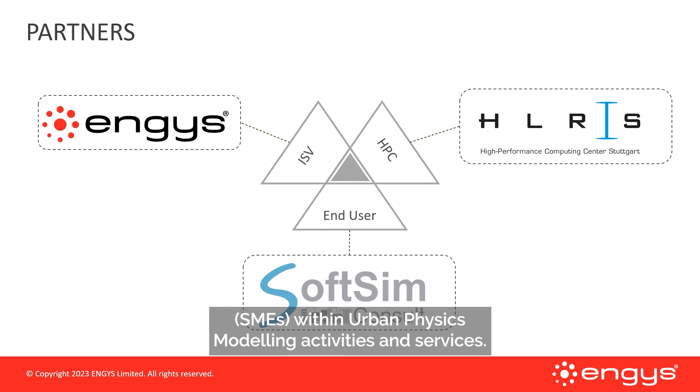As most of you know, ENGYS is a global CFD product and service provider. They were founded in the UK back in 2009. The products are widely used in various industries, including automotive and AEC sectors. HELYX is the main product of ENGYS. The tool provides an easy-to-use GUI and unlimited scalability, and it is well validated with reliable methods and fully transparent. Furthermore, HELYX comes in a package with extensive written documentation and responsive technical support.

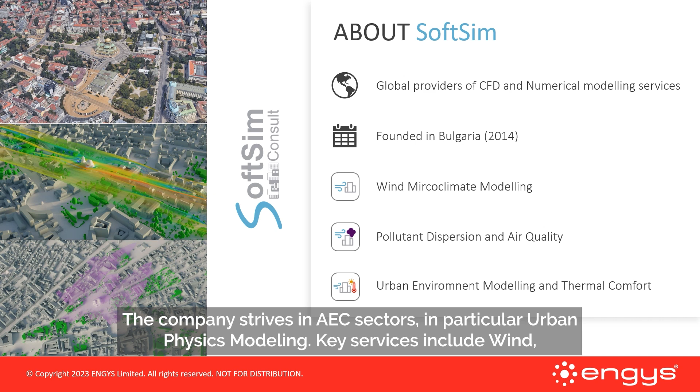SoftSim is a global provider of CFD analysis and consultancy services. We were founded in Bulgaria back in 2014. The company strives in AEC sectors, in particular urban physics modeling. Key services include wind microclimate modeling, pollutant dispersion and air quality, urban environment modeling, and thermal comfort.

The main objectives of the current webinar are an overview of the Cloud Sophia project by going through a discussion for AEC and UPM industry challenges, Fortissimo project motivation and details, as well as the main conclusions drawn during project and development works.

To understand the motivation behind the work, we need to say a little about the AEC sector and UPM industry. Architectural engineering and construction design are going through a rapid transformation to undergo the transition to a digital era. This pressures design teams to use more advanced modeling tools in the BIM process. This is particularly true for urban physics modeling.

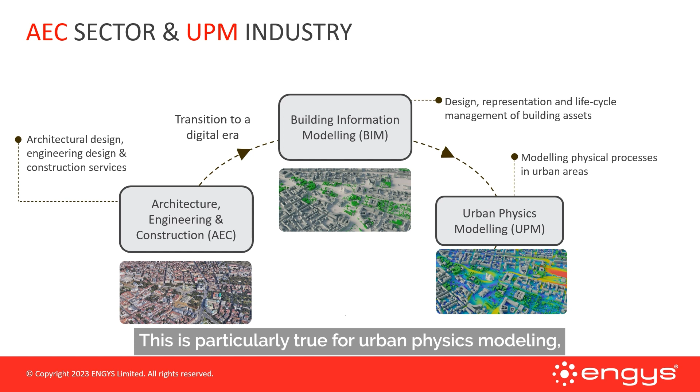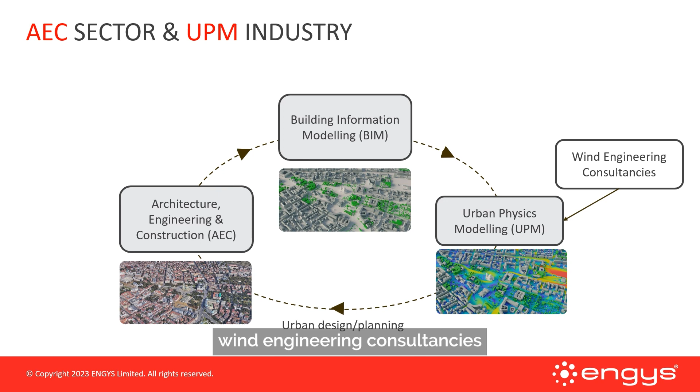SoftSim consultancy is thriving in the urban physics modeling sector together with many other small and medium wind engineering consultancies. Competing with large companies with complete engineering cycle services embedded in their structures becomes more demanding for high quality and fidelity CFD modeling and services.

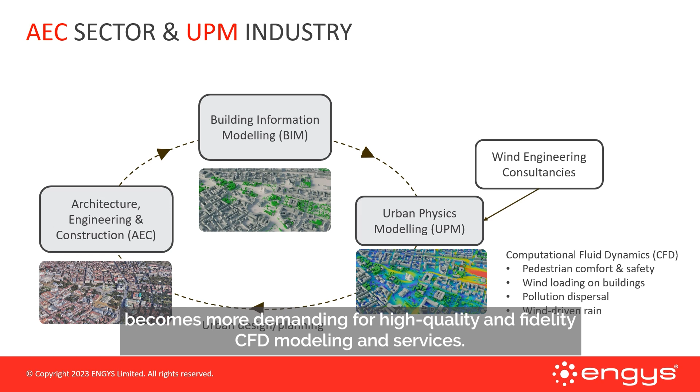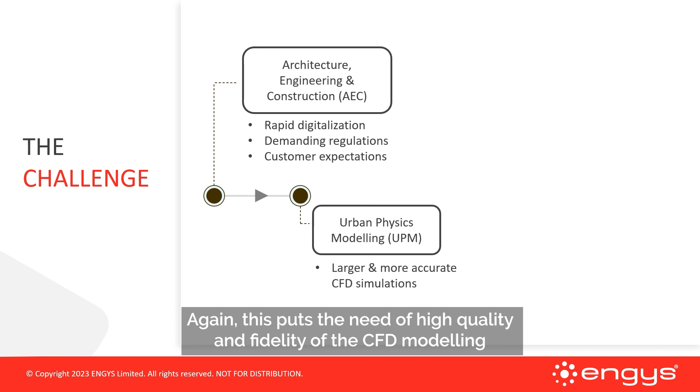Some of the main challenges in the industry are rapid digitalization of the sector, demanding regulations, and constant growth of customer expectations. Again, this puts the need of high quality and fidelity of the CFD modeling and services in the urban physics sector.

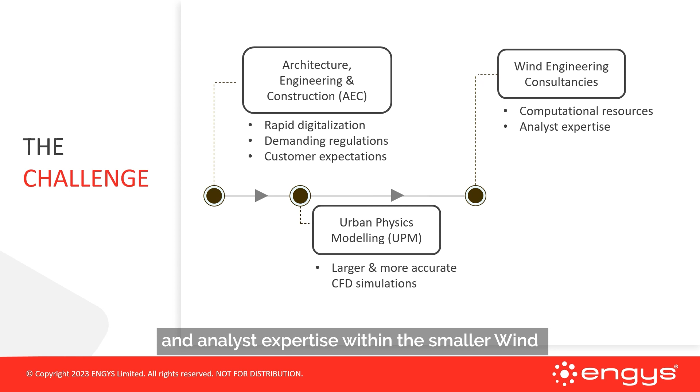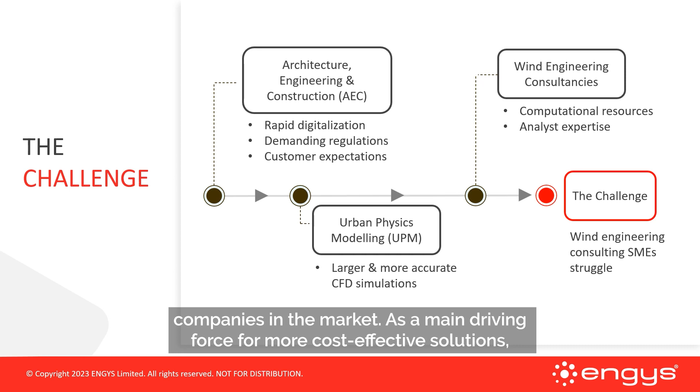All this emphasizes the need for larger computational resources and analyst expertise within the smaller wind engineering consultancies. Small and medium consultancies start to struggle to compete with larger companies in the market as a main driving force for more cost-effective solutions. Without SMEs, the entire architecture, engineering and construction industry would be put under high pressure.

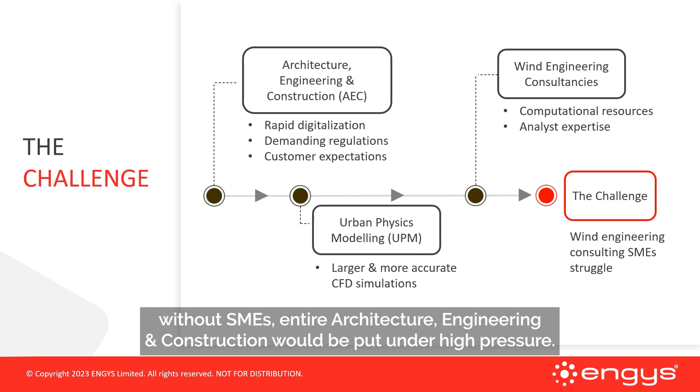This way, the main objectives of the current work can be clearly stated: meet the industry's demands for high-fidelity products, help SMEs keep up with the competition, and provide the required means for constant and sustainable growth of SMEs.

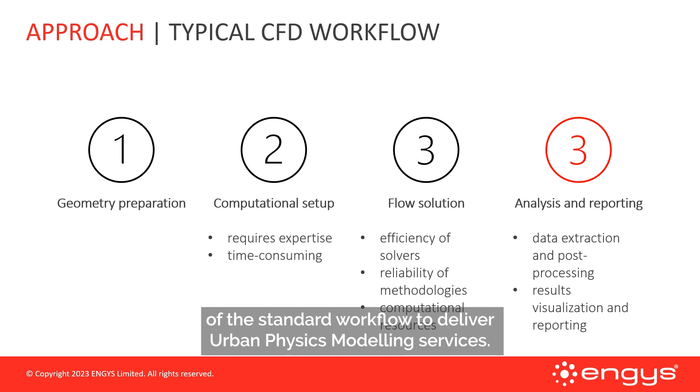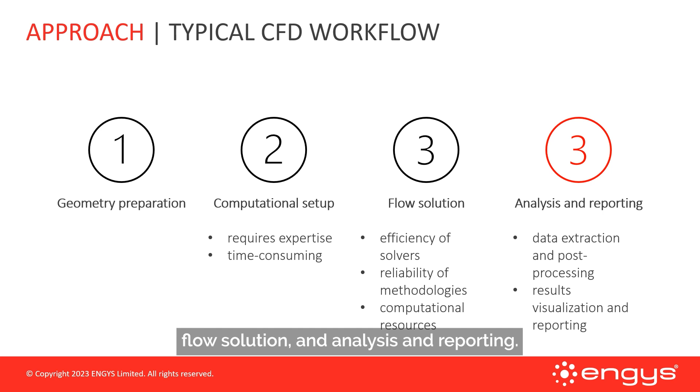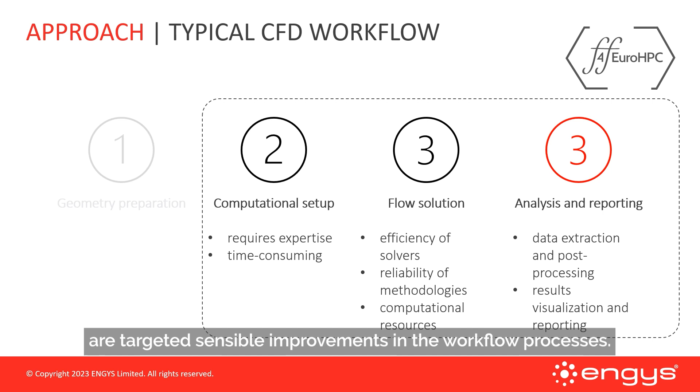There are four main stages of the standard workflow to deliver urban physics modeling services. These include geometry preparation, computational model setup, flow solution, and analysis and reporting. With the proposed new multi-instance framework, improved post-processing features, and capabilities of the block-coupled solver, sensible improvements are targeted in the workflow processes.

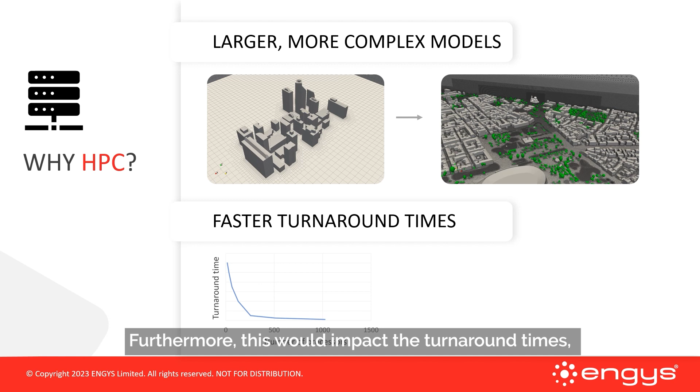The proposed solution includes the development of a comprehensive UPM solution based on enhancements in the CFD software, verified automated workflows, and on-demand HPC resources. Through all these enhancements and HPC resources, modeling more complex flows in large-site models would be feasible for any small wind engineering company. Furthermore, this would impact the turnaround times, giving the required means for competing with larger consultancies on the market.

In the Cloud-Sophia project, four sequential tasks were completed, including new methodology development, deploying HELYX on the HPC facility, validating and verifying the multi-instance framework code with experimental data, and finally applying the new multi-instance framework for a large full-scale site located in Sofia, Bulgaria.

In the current webinar, attention will be focused on the full-scale application. The site encompassed a 4 square kilometer area at the existing city center of Sofia, centered at the Alexander Nevsky Cathedral. A wide variety of numerical modeling of the site were completed.

Two numerical discretization schemes were developed, depending on the local mesh refinement requirements. These computation meshes had various parameters and sizes, from 170 million to 190 million cells.

Wind microclimate simulations were completed at every 10 degrees of the approaching winds, with 5 different atmospheric boundary layer setups. With one rotation, it was completed pedestrian comfort and safety assessment, mean pressure facade analysis, and wind-driven rain and water accumulation analysis with the Eulerian modeling approach.

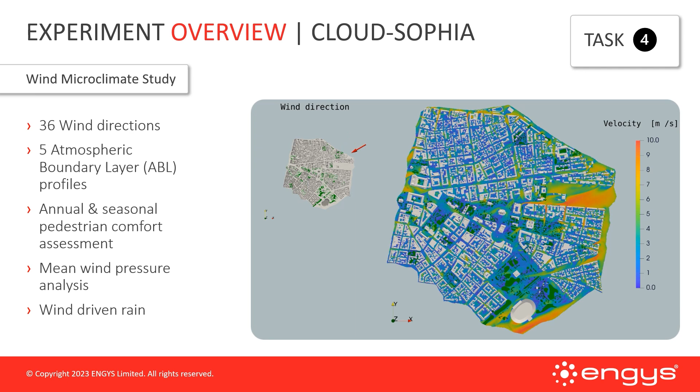Pollution dispersion analysis was completed in separate runs for the prevailing wind sectors. It assessed the impact of small-sized backup power generation engines sparsely located in different buildings around the target site of the Alexander Nevsky Cathedral.

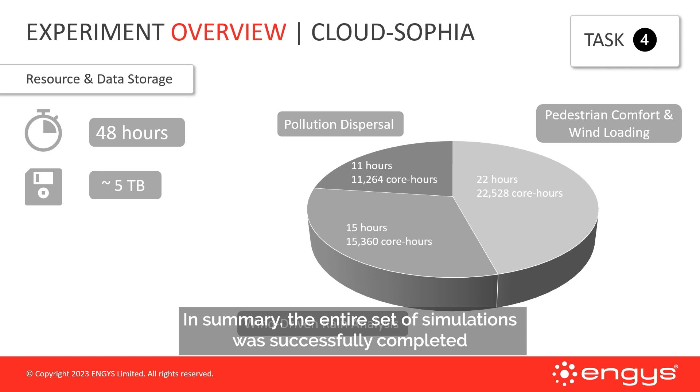In summary, the entire set of simulations was successfully completed in less than 48 hours, with total output data of approximately 5 terabytes. A total of 50,000 core hours were spent.

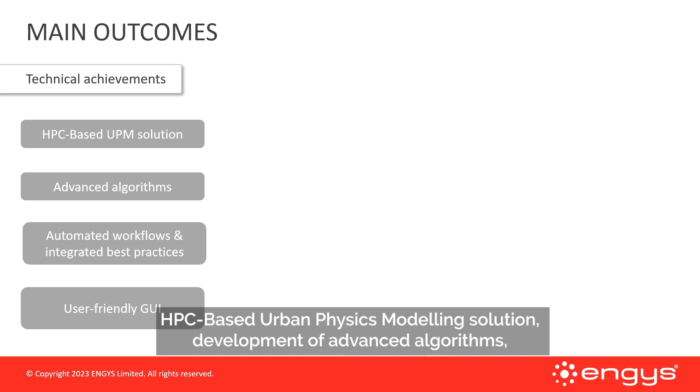Main technical achievements for completed development include a complete HPC-based urban physics modeling solution, development of advanced algorithms, introduction of automated workflows which integrate best practices, and last but not least, a user-friendly environment through the development of the graphical user interface. All these allow unlimited scalability of the project works, the enhanced software product, and streamlined processes.

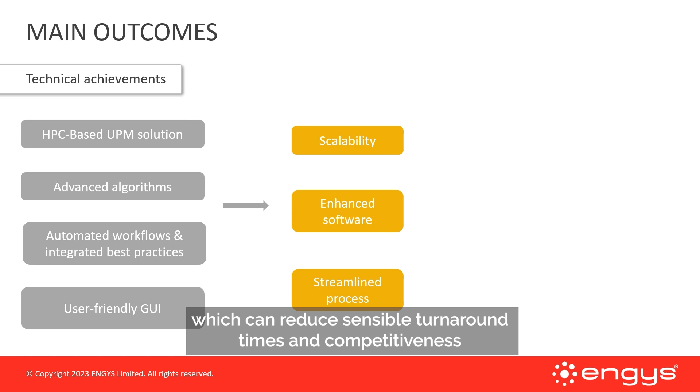These can reduce sensible turnaround times and improve competitiveness of the SME consultancies.

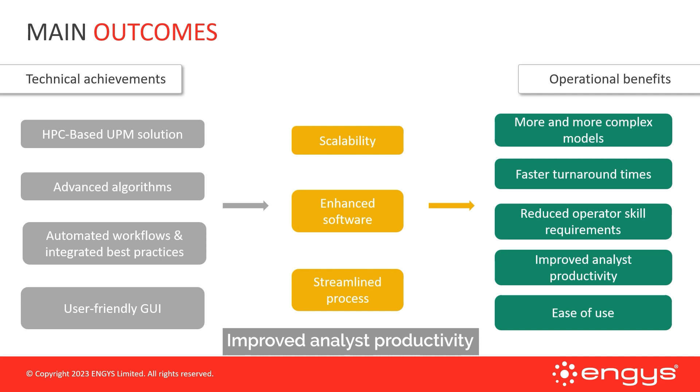Summarizing the operational benefits to all users: more and more complex models can be constructed and tested, faster turnaround times for the projects, reduced operator skill requirements, improved analyst productivity, and ease of use of the GUI and CFD modeling environment.

Strategical benefits for SoftSim in the results of the Cloud Sophia project are the ability to take and work on more complex, lucrative projects, thereby increasing company revenue; sensible reduction of operational costs, thus increasing profitability; and creating a more sustainable company environment by expanding the staff and improving sales and marketing capabilities.

Looking for a wider impact on the UPM and AEC industry, Cloud Sophia has offered a reliable and efficient process chain for urban physics modeling, a platform for experts to add value to the design, and a more competitive, resource-efficient, and sustainable AEC sector by impacting all processes of urban physics modeling.

Take-home messages of the current webinar are the answers to the following three questions: Has the challenge been addressed? Was cloud-based HPC required to address the challenge? Have the partner SMEs become more competitive?

Yes, the challenges related to SME wind engineering consultancies were successfully addressed. Cloud-based HPC is one viable solution for large-scale site assessments. And yes, SoftSim became a more competitive SME consultancy and has demonstrated constant growth, exceeding 50% over the last 2 years.